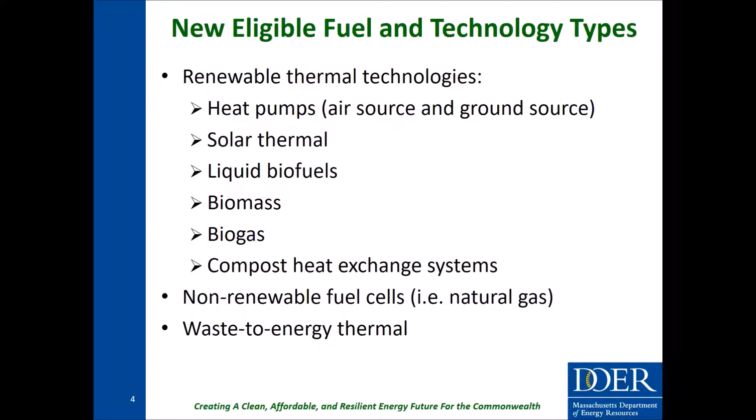So just to recap, the renewable thermal technologies, which is what we're going to be focusing on today, that are eligible include air source and ground source heat pumps, solar thermal systems, liquid biofuels, biomass, biogas, and compost heat exchange systems. And then in addition, in this rulemaking, we also added non-renewable fuel cells and waste to energy for thermal purposes.

So just some general program logistics: any system that came online after January 1st, 2015 is eligible for the program. Systems that have been operating since January 1st, 2015 and meet all of our eligibility criteria are actually eligible to receive retroactive credits for that period, and they'll qualify all of that production during the Q4 2017 minting in April.

All systems have to deliver a useful thermal load to Massachusetts, so they don't necessarily have to be located in Massachusetts. You could have a system that is maybe located right over the border, but as long as they're delivering a useful thermal load into the Commonwealth, they would be eligible.

And any system which received 80% or more of their total construction and installation costs from either DOER or another state entity prior to the effective dates of the regs would not be eligible. That's really just to prevent over-incentivizing any projects that have already received a large chunk of funding from either DOER or the state.

So one of the main components of this program is the size classifications, which really dictate how your system is going to be metered. All renewable thermal technologies are divided into one of three size classifications: small, intermediate, and large.

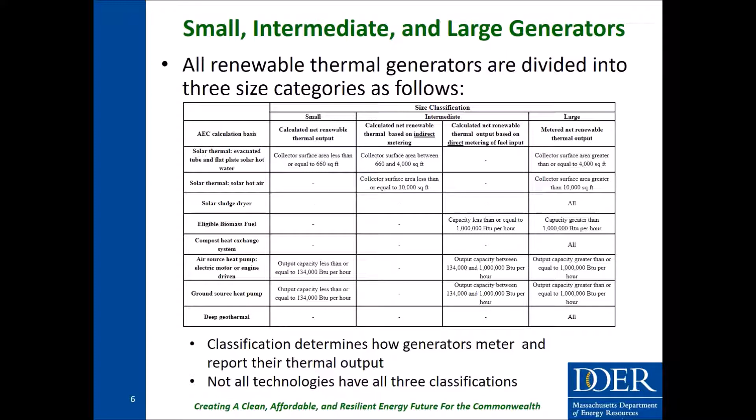In addition to the size classifications, small systems, which are allowed to have their certificates calculated by a formula, also have the opportunity to pre-mint their certificates. DOER defines pre-minting as being eligible to receive 10 years of certificates up front.

For a lot of these small systems, they're not going to be getting a huge volume of AECs. If that were spread out over the lifetime of the system, they might only be getting $100 or even less a quarter or a year, which doesn't really have a meaningful impact on system financials. So the idea is to give them 10 years of certificates up front, which can immediately help drive down the capital cost of the system and have a larger financial impact.

But DOER does recognize that having all these small systems come into the APS and get 10 years of certificates up front could provide some supply issues in the market. So we have a provision: right now the APS is about 50% undersupplied, meaning 50% of compliance is being settled with certificates and 50% with the alternative compliance payment.

If we were to get to a point where 75% is being settled with certificates and 25% with the alternative compliance payment, these small systems would switch from pre-minting to what we call forward minting, where they're still using the same formula to calculate the number of certificates, but instead of getting them all in one lump sum up front, they would get them over 40 quarters. This still provides certainty as to the number of certificates you're getting, but it helps put the brakes on supply coming into the market and helps things stabilize.

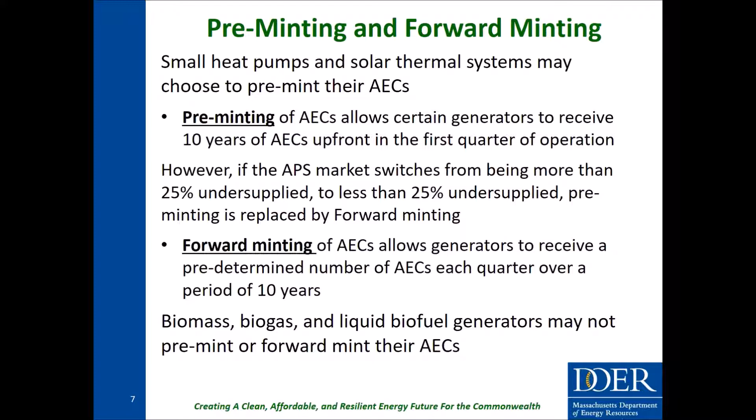Additionally, as laid out in the statute, we're able to give certain technologies certificate multipliers - any non-emitting renewable thermal technology, which again excludes biomass, biofuel, and biogas systems. For all other technologies, we're able to give them a multiplier. Typically you'd see 3,412,000 BTUs equal a megawatt hour equivalent, which equals 1 certificate.

But for some technologies, they're actually getting more than that. If you have an active solar hot water system used for domestic hot water, instead of getting 1 AEC for your megawatt hour equivalent, you would be getting 3. That's again just to recognize that the number of certificates these systems might receive isn't quite meaningful enough to really drive the market to adopt these technologies, so credit multipliers help provide a more meaningful incentive.

You'll notice too, similarly to the size classifications, not all technologies have a multiplier at different levels. So it's kind of per technology, per size.

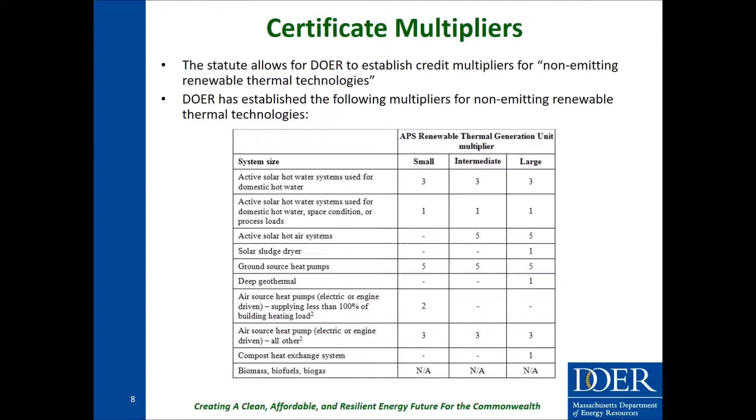In addition to those, any air source or ground source heat pump installed in an energy efficient building, a zero energy building, or a passive building is eligible for an additional multiplier of 2. That would be added to the multiplier we saw on the previous slide.

So if you had a ground source heat pump system with a multiplier of 5, but your system met the Department of Energy's definition of zero energy, your new multiplier would actually be 7. That 2 is always added to the base multiplier.

This is really just to acknowledge that if you have a really efficient home, your heat load isn't going to be as high as if you had a less efficient home, so you might not be getting as much of an incentive even though your system costs the same. This helps provide an incentive for having a very energy efficient home, and potentially being net zero or a passive building.

Going through the technologies, there's a lot of text on these slides. I'm probably not going to read all of them, but like Warren and Samantha mentioned, this should be available, and I can always provide more information if people have questions on specific technologies.

For air source heat pumps, the majority of the eligibility criteria pertain only to the small systems, and that's because we are using a formula to calculate their certificates. We made some assumptions when designing those formulas, so in order to make sure that systems being installed are matching those assumptions, we have a good amount of eligibility criteria.

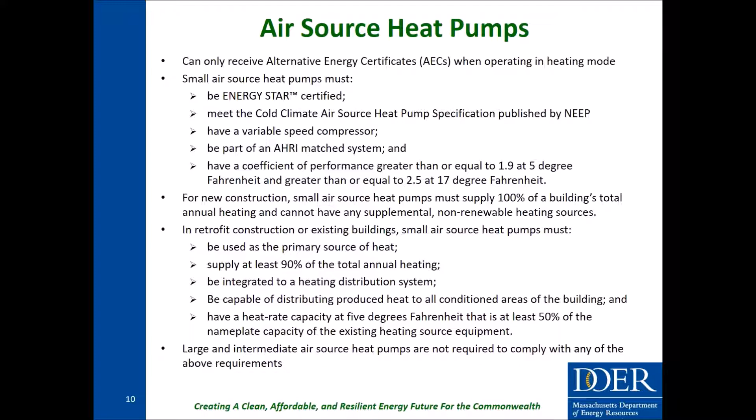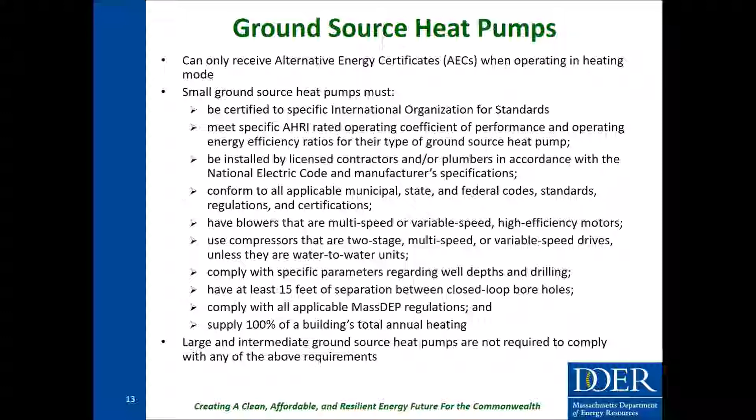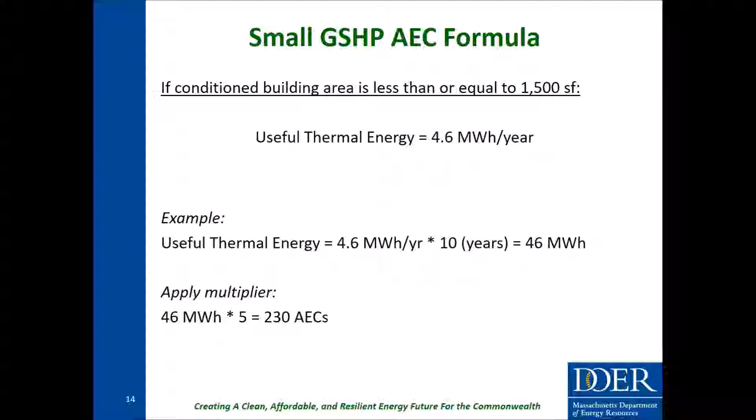The formula for small ground source heat pumps is very similar to the air source heat pumps, just with some different coefficients. If you're less than 1,500 square feet, you're getting 4.6 megawatt hours per year, so times 10 years would be 46. The multiplier for ground source heat pumps is 5.

So you would be getting 230 certificates. If you were over 1,500 square feet, same formula, just different coefficients. So if you were doing a 2,000 square foot building, you would plug that 2,000 in as A. You would get 61.5 megawatt hour equivalents over 10 years, and then times your multiplier would result in 307 certificates. If you were getting that extra multiplier of 2, you end up with 430 certificates.

And those are all given to you in that pre-minted lump sum. So you would get that right away at the first minting after you're qualified, and you would be able to sell that for a total lump incentive.

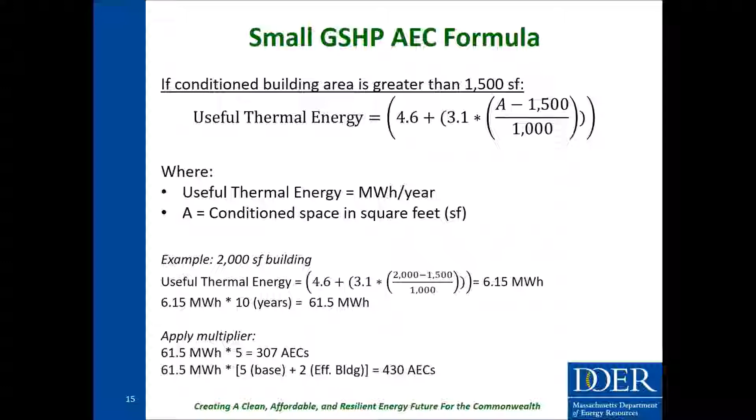Solar thermal systems apply to all sizes. It has to be an active system, so you have to have some sort of pump or fan that's moving a fluid through the system. They have to have a performance specification, so we expect this typically to be OG 100 or OG 300. There are a couple different entities we think we'll see primarily for rating to those specifications, but if other entities get into this space, DOER can start accepting those on a case-by-case basis.

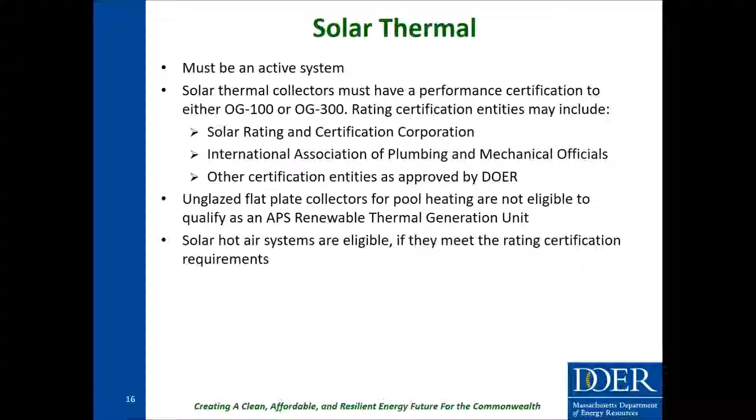We don't allow unglazed flat plate collectors for pool heating, because from talking to the industry, those are really primarily only used for outdoor pool heating. Again, because we're targeting more whole home solutions, we really want to see people either using glazed flat plate collectors or evacuated tube collectors that maybe are heating their pool but are also tied into their home's domestic hot water or space heating system. Solar hot air systems are also eligible, but they have to meet all of the requirements stated above.

We have two formulas for small solar hot water because you can use two different performance specifications. I should mention the difference between OG 300 and OG 100. OG 300 looks at a whole system—the collectors, the piping, the tank—and gives you an annual output. OG 100 is just looking at a single collector, and it gives you a daily rating. That's just taken into account in this formula, but it tracks very similarly to the previous one.

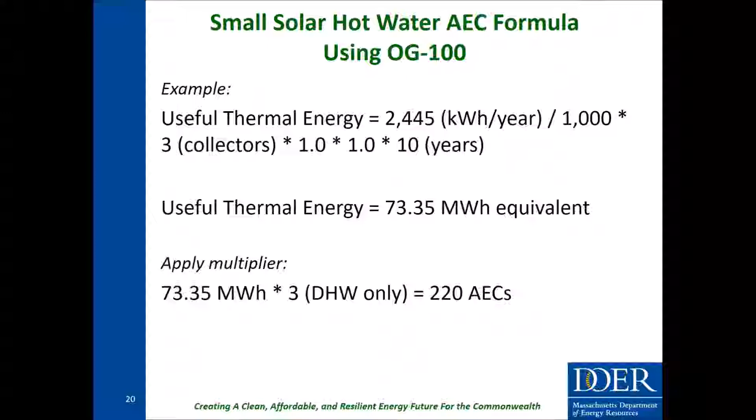Liquid biofuels are defined in our definition as being created from organic waste feedstocks. Organic here refers not to USDA organic, but organic in the natural sense. We've identified waste vegetable oils, waste animal fats, and grease trap waste as some examples, but it could be other things if the feedstocks are coming in and the biofuel industry is coming to us. We'll decide on a case-by-case basis what we think should be eligible.

They have to be at least a 10% blend. Right now, the heating oil industry is using about a 5% blend, where they're using 95% regular number 2 fuel oil and 5% biofuel.

So really to try and push the market towards using more biofuel, they have to blend with at least 10%. So you can have 90% number 2 fuel oil and 10% eligible liquid biofuel, but you're only ever getting certificates for that eligible liquid biofuel. So the higher blend level you're using, the more certificates you'll get.

And this liquid biofuels, it works a little differently than you would expect in most portfolio standards. So for large systems, it works the same, where the generation unit owner is being given the AECs. But for the intermediate systems, which we defined earlier as anything less than 1 million BTU per hour capacity, it would mostly be residential, small commercial.

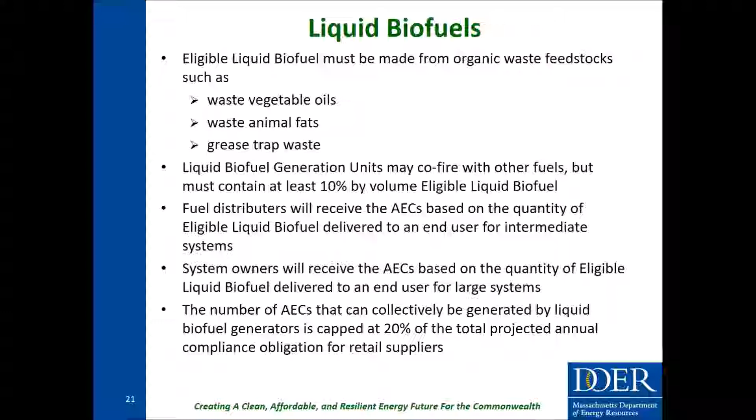So that's 20% of the compliance obligation from 2 years prior, which is always the most up-to-date information we have as far as compliance is from 2 years ago.

So for the intermediate biofuel systems, these operate similarly to some of the small systems where the AECs are calculated based on a formula. So you'll see here it's based on the BTU content of the biofuel, which DOER has established as 127,000 BTUs per gallon, the volume of the fuel delivered, and then the blend content. So that's really capturing that you're only getting certificates for the eligible liquid biofuel. And then the efficiency of the unit you're delivering to. So we've established this as 85% for boilers and 80% for furnaces.

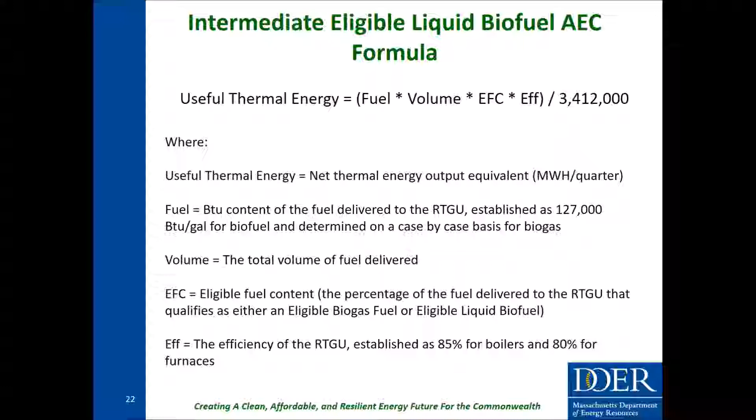So an example here would be if you were selling 10,000 gallons of a B20 blend to someone with a furnace, you can see the calculation. It would end up in about 59 certificates that would go to the biofuel distributor.

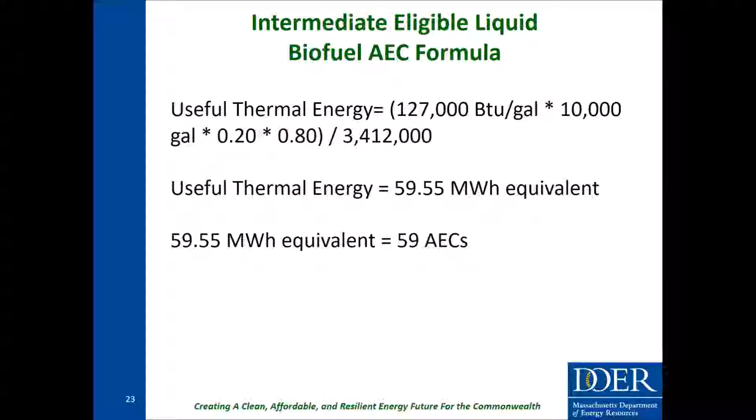And then if there was any remaining, so say in the first half of the year, there's 10% available. If they only are reported for 8%, that remaining 2% would roll over into the second half of the year. So they would have in quarter 3 and 4, they would have 12% of the cap available to them. If at any point the cap is reached, then everything's allocated on a pro rata basis. So you would still have an incentive to blend more biofuel, because the more biofuel you're blending, the higher your percentage of the pot is going to be.

So we've also, because we have so many requirements about what is defined as eligible liquid biofuel, DOER is establishing a list of biofuel suppliers. So we'll kind of be pre-qualifying people that are making biofuel, so that biofuel distributors or wholesalers can reference that list, know that that fuel is going to basically be pre-qualified, can purchase it and sell it on to their end user and be certain that they're going to get AECs for that.

So just a few requirements for those suppliers. They have to apply to be included on the list. They have to be a part of the EPA's renewable fuel standard. They have to provide all sorts of documentation to DOER so that we can verify the feedstocks that they're using. And we'll be also doing that on a quarterly basis, looking at what are the feedstocks that they're using and does that meet our definition of eligible liquid biofuel.

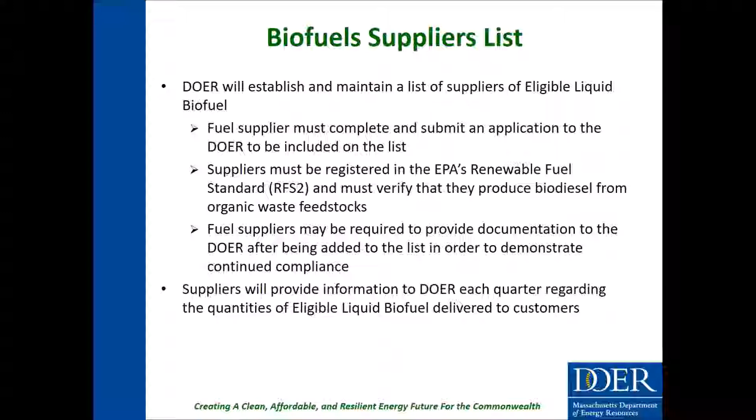So biogas and compost heat exchange systems. A biogas system could be anything like an anaerobic digester or a landfill that's using that for a thermal load. Because you would have to have a thermal load on site, it's not like with electricity where you could net meter. The eligible biogas fuel has to be conveyed directly from its source to the generation unit where it's being consumed by a dedicated pipeline.

For compost heat exchange systems, these are aerobic biodegradation of organic matter, so compost piles where they actually have technologies that can extract the heat from that compost and put it towards a useful thermal load.

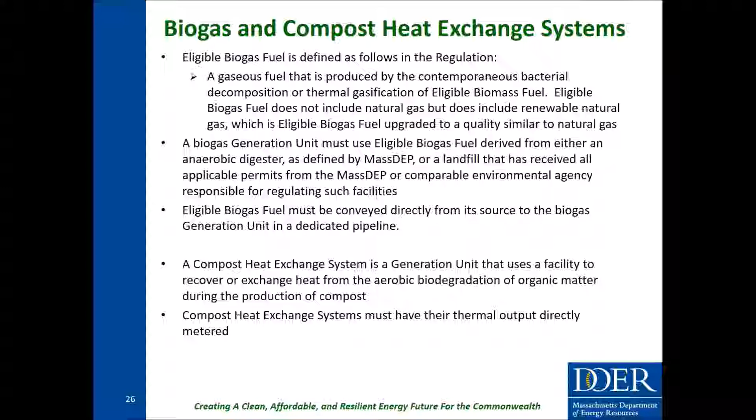So woody biomass has the most requirements out of any of the technologies, and that's primarily because in the statute that was passed, the legislature directed DOER to address 5 main areas: emissions performance standards with particular focus on PM 2.5, and a 50% reduction in life cycle GHG emissions.

There has to be thermal storage or something to help minimize cycling and preserve efficiency. There has to be efficiency standards. And then also, in consultation with our sister agency, the Department of Conservation and Recreation, we had to establish sustainable forestry practices. So you can't just be clear cutting a forest and qualifying that to generate AECs. The wood really has to be coming from a sustainable forestry practice.

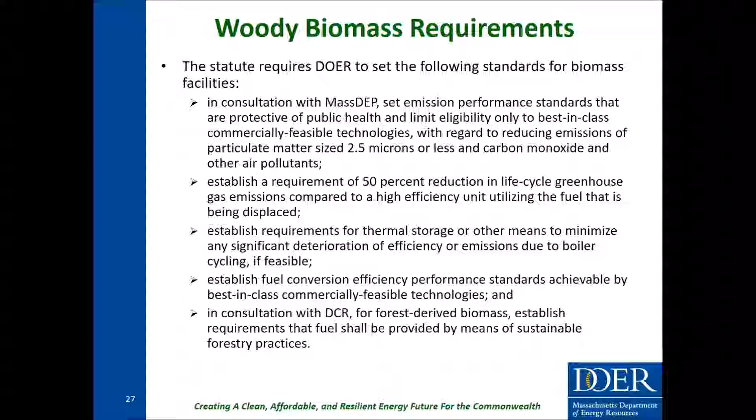So getting into some of these more specifically, the feedstock requirements: we have 4 different categories of feedstock that you can classify: residues, thinnings, forest salvage, and non-forest derived residues.

Residues and thinnings are really coming directly from the forest. Forest salvage is exactly what it sounds like—if you had an ice storm come through and take down a bunch of trees, you would have to clear that out of the forest anyways, and so that could be used as fuel. And then non-forest derived residues are things like secondary products from a forest products industry, so if you had sawdust from a mill or a wood shop, something like that.

And that requirement is because, as an agency, our larger agency, the Executive Office of Energy and Environmental Affairs, also has a responsibility to help the forest industry. And so this program, we're hoping, really helps them by having a second market for their forest products. So right now, there's not a whole lot of forest management going on in Massachusetts, and that's just because it's very expensive and they don't have anywhere to put the wood that's coming out of that management process. And so this hopefully is going to be a place for them to put that and use it for fuel.

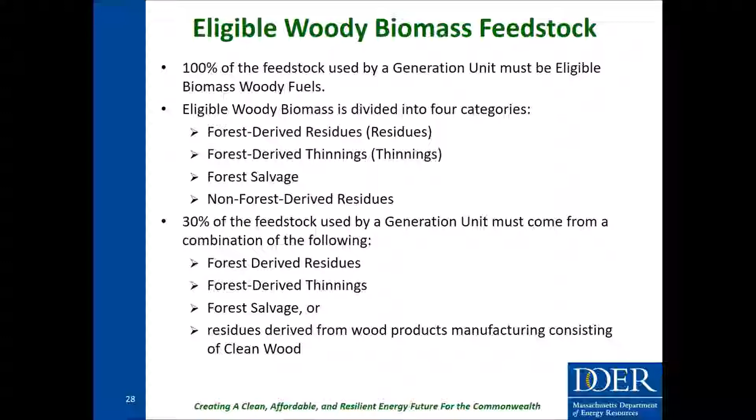So again, emissions performance standards—these are about 3 times lower than the EPA standards, but still very feasible to be met based on the technology that's out there. We do have a lower standard if you're located at a sensitive population, which DOER identifies as a school, a hospital, a nursing home, or we could determine it to be any other facility. You would have to meet a quite lower threshold for your PM 2.5.

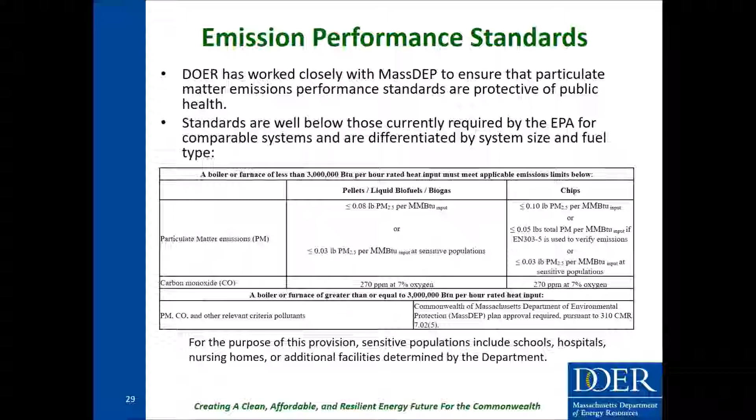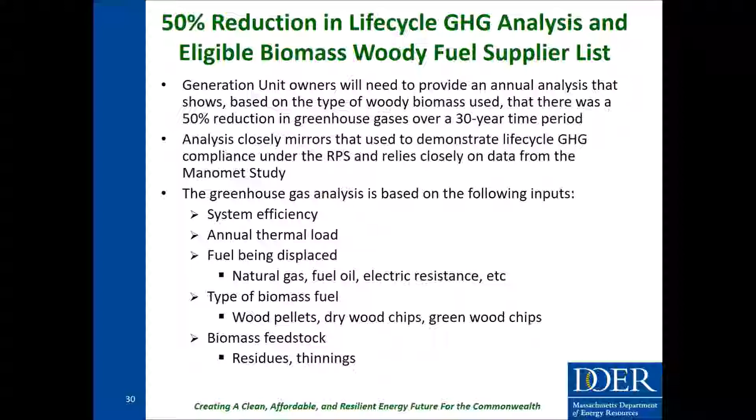So 50% reduction in life cycle GHG analysis—we determined that to be over a 30-year time period. The analysis for this trends very closely to the analysis we currently use in our RPS. It's based off of a study we had done a couple years ago all about greenhouse gas emissions in forests. It's based on a couple different factors: efficiency, your load, what fuel you're displacing, what type of biomass fuel you're using, and then what's the feedstock that went into that fuel.

But we know that a lot of smaller systems, homeowners, small commercial systems might not want to complete that analysis. It might be too much for them. They might not understand some of the inputs.

So similarly to the biofuel suppliers list, in order to provide some simplicity to this program - which isn't very simplistic as a whole, but in this particular spot - we are going to establish a biomass suppliers list where we'll be pre-qualifying fuel suppliers who have met all sustainable forestry and GHG requirements. So as a homeowner, you could go to this list, and if you're purchasing fuel from someone, you don't have to worry about the GHG calculator. You don't have to worry about any of the sustainable forestry requirements. It's all been pre-approved for you.

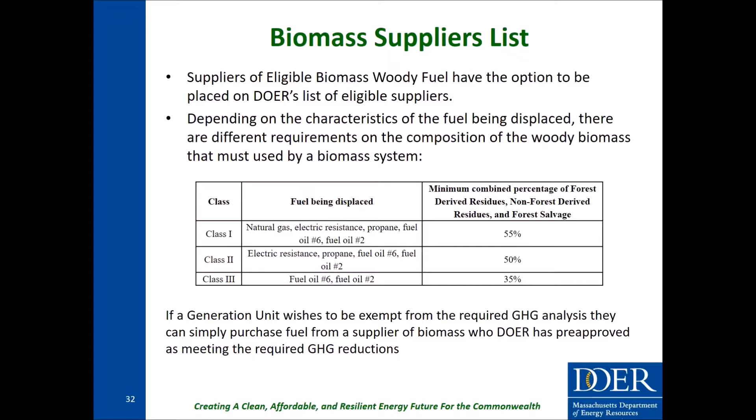And on that list, we'll have a couple different classes, because when you look at displacing fuel oil versus displacing natural gas, the number of residues you would need differs a lot. By breaking it up into classes, we provide more flexibility to fuel suppliers. If they can't get a lot of residues and they're using more thinnings, maybe they're only qualified for class 3, and they can just sell to people displacing fuel oil. But if residues isn't a problem for them, they can supply to everyone. It's just giving them a little more flexibility.

We do have some thermal storage requirements, but we also have the ability to be exempt from these. We know thermal storage isn't suitable for everyone, so we allow for some exemptions on a case-by-case basis if you can really prove to us that your system would be better without thermal storage, or if thermal storage would cause a detriment to your system's efficiency and PM emissions.

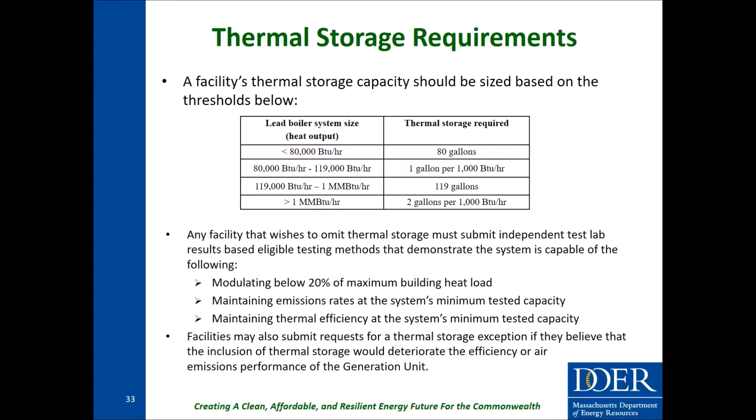We have some efficiency standards and general requirements. All systems have to be automatically fed. They have to have fuel storage, feedstock conveyance, all of that. We require 85% efficiency for pellets, 75% for chips. If you're using the European standards to certify your systems, the requirements are a little more stringent - for efficiency it would be 80%, and your PM emissions would have to meet a lower threshold as well.

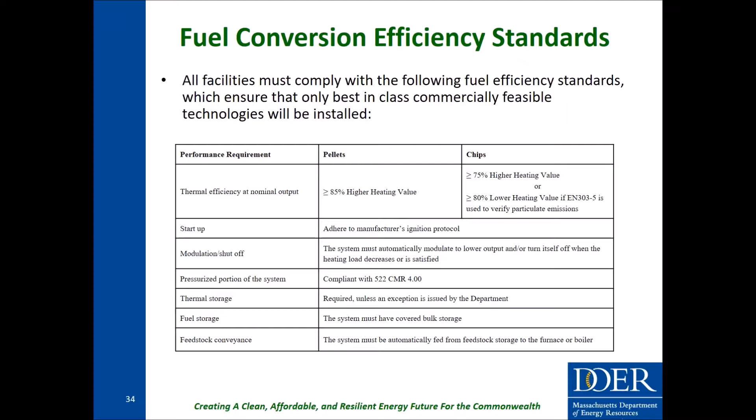We have some fuel quality specifications. These just give DOER another layer of security as far as your PM emissions and efficiency. If you're using a better quality fuel, you're going to get a better burn - higher efficiency and less emissions.

So if you're a boiler under 3 million BTUs, you would have to meet all the specifications listed here unless you installed some sort of emissions control technology. For some larger systems, utility scale or really large commercial systems, there's a big benefit for them to be able to use green chips, and these specifications wouldn't normally allow that. But if you were to install something like an electrostatic precipitator that brings your emissions almost virtually to zero, we're going to exempt you from those fuel quality specifications because we know you're getting virtually no emissions from your system.

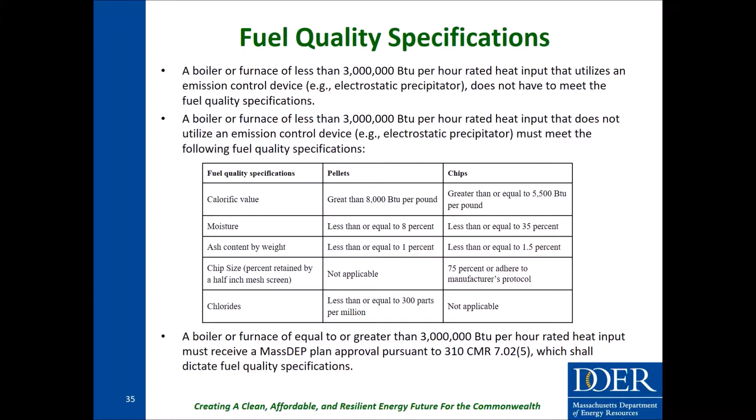If you are over 3 million BTUs per hour capacity, the Massachusetts Department of Environmental Protection actually requires you to get a permit, so they would be working with you on your fuel quality standards - you don't have to meet anything for us.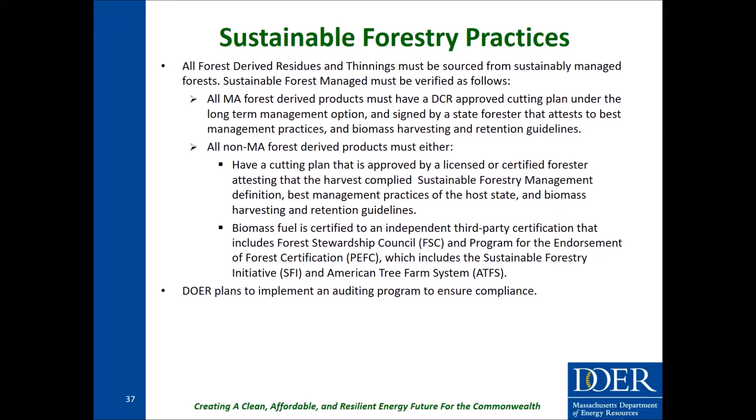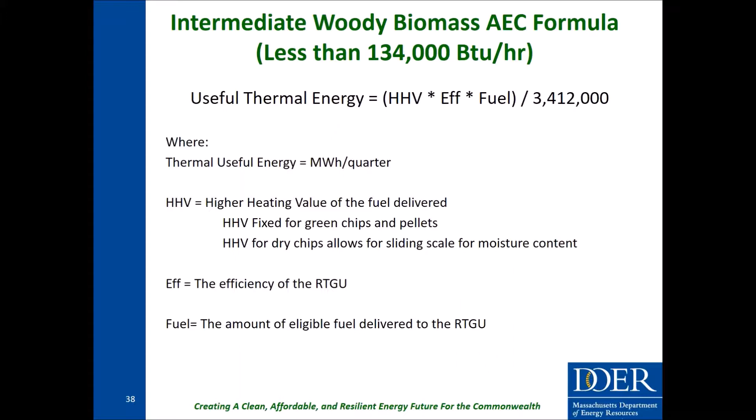For the intermediate woody biomass systems, this is the AEC formula they'll be using. It's all based on the higher heating value of the fuel, the efficiency of your unit, and the amount of fuel delivered. Pretty straightforward. For example, if you were using pellets with an 8,000 BTU per pound higher heating value, and your system is 85% efficient, and you were using about 5 tons a year, which would be 10,000 pounds, you're looking to get about 19 AECs for that quarter.

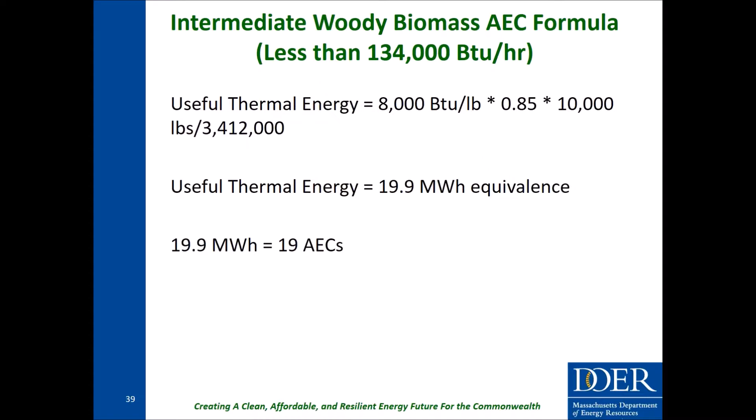Generally, the qualification procedure is: generation units submit an application to DOER. DOER reviews and approves that application. You would need an independent verifier, which is very common across the portfolio standards, especially in New England where you're reporting to the NEPOOL GIS. An independent verifier is basically an independent third party that reads your meter, verifies the production, and then uploads it to the NEPOOL GIS where your certificates are minted.

For the small systems and the intermediate biomass systems, the Massachusetts Clean Energy Center is actually taking on that role. So for residential and small commercial systems, they don't have to work with anyone - it's just built in that Mass CEC will do this for them. If you were an intermediate or larger system, you would need to work with another entity to do that for you. Once your IV starts reporting production, your certificates start being minted.

Our application portal opened last week. It's also hosted by the Massachusetts Clean Energy Center. It's 6 steps, you can save after each step, you can exit after each step, and you can have multiple applications open at the same time. It's one of the more functional portals I've ever seen. It has a lot of great features in portal communication, where DOER can write a note on an application that updates the applicant that they need to fix something, plus automatic email updates anytime your application status changes or if DOER requests more information.